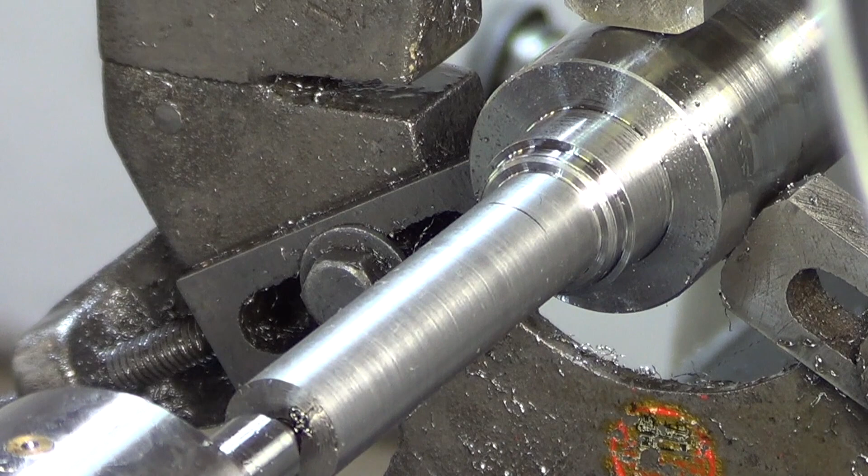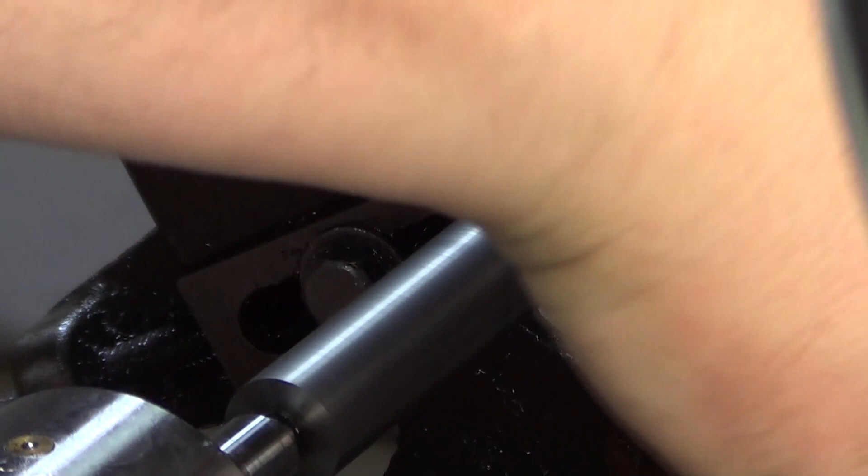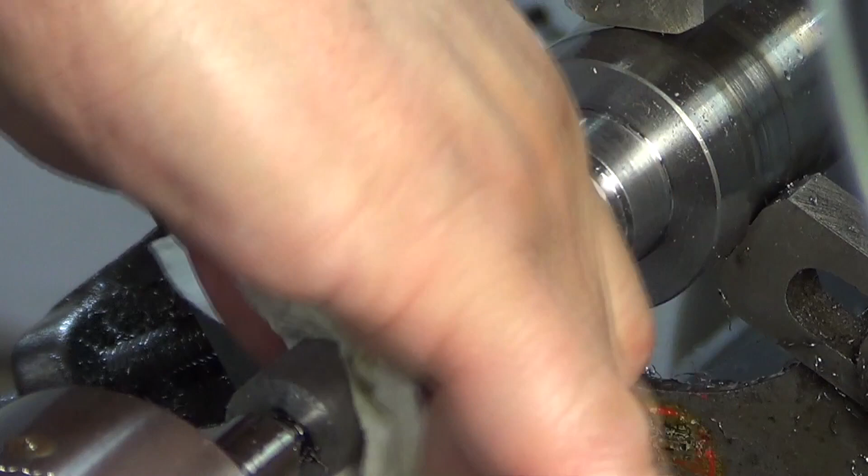Okay, I've got you zoomed right in. And now it's time to do the deed. So let's do it. So this is going to mean a little bit of polishing, cleaning, measuring several times, all right? It's important to do it as often as possible at this point. There's no room for error. So if you're doing this, take your time. There's no rush, guys. Okay, a little speck of dust here. Make sure my mic is good. All right.

See, just that. And I've gone down 1/1000th of an inch already. I'm at 71.5. 671.5. So I've got 1.5 thousandths of an inch to go. This is nice and even, 71.55. We're talking like 5/100ths of a thousandth of an inch here. So I'd rather go, you know, half or 5/10ths of 1/1000th at a time and then not miss my target. So right now I've got 1/1000th of an inch to go.

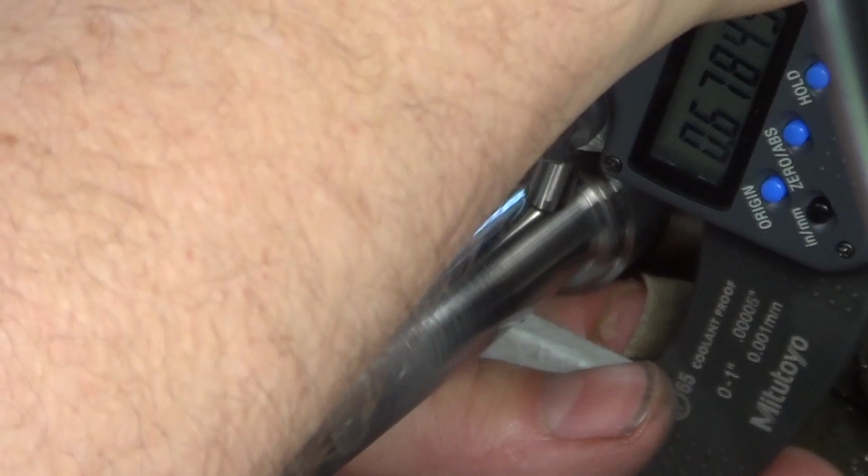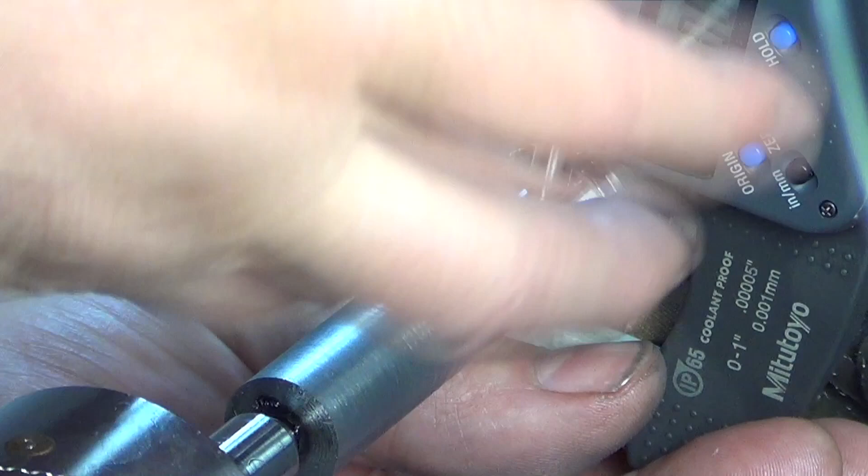And I'm checking my micrometer every single time. There we go. I'm sweating bullets here. This is nerve-wracking for me. Of course, one of the bad things about doing this by hand is that it may not be equal pressure. So probably a good idea if you check the different surfaces, you know, around the circumference. So here I'm right on target at 670. And you know what? I can live with it. 670 and 1/10.

Yeah. Now I said 669.7. That would mean I got 3/10ths to go. You know what? I'm gonna call it even. It's done. So that's how nerve-wracking this can be. But it's done now, right? So I'm very happy with that. So that's done.

Now I need to turn down the part for the pulley up to where the threads are going to start, because clearly I need that diameter to be turned down so that I can thread these really funky threads. So that's what I'm going to get prepared for. The important stuff just never seems to end in a project like this. So now we've got to turn down the pulley journal, and that's got to go down to 580 thousandths. So that's 91 thousandths from the current diameter. I'm going to take 30 thousandths at a time. Let's do it.

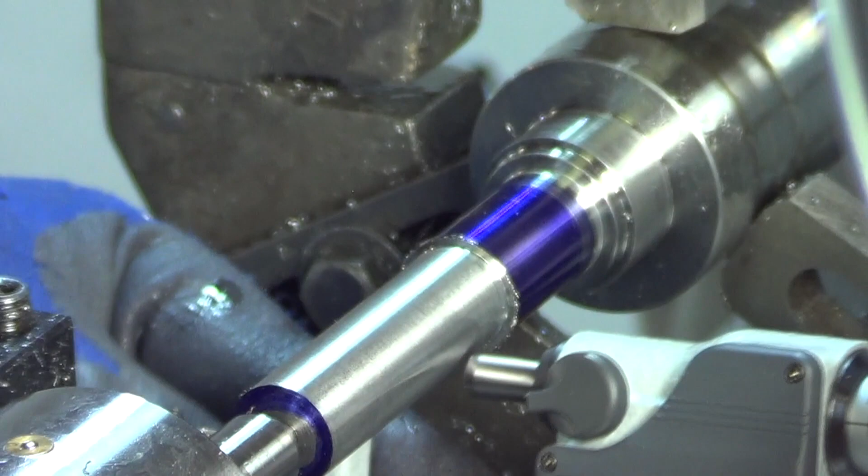I know the pulley sits around here. So I thought I had 20 to go. That's exactly what I've got. I'm at, sorry about my arm, I'm at 600 thousandths. So I'll dial in another 20 and that'll be perfect. So here we go, dial that. Leave myself 1 thousandth to play. Here it comes. All right, do a quick little cleanup here. It's not warm. No, it is warm. So I'm going to wait a couple minutes and come back to it.

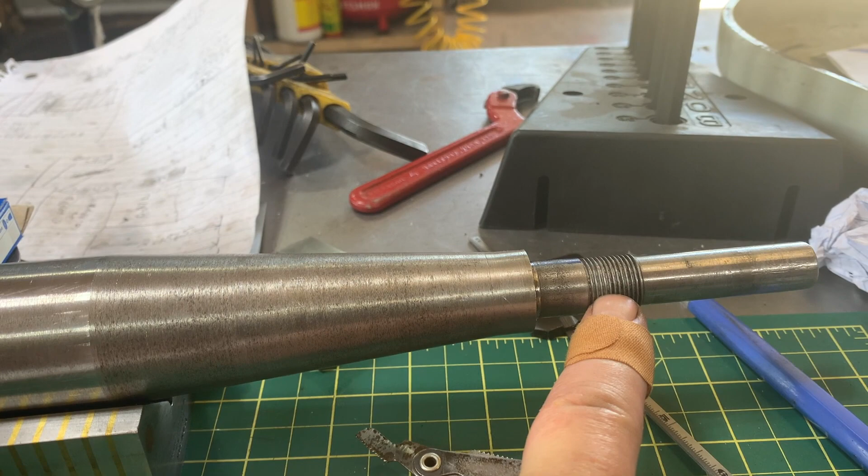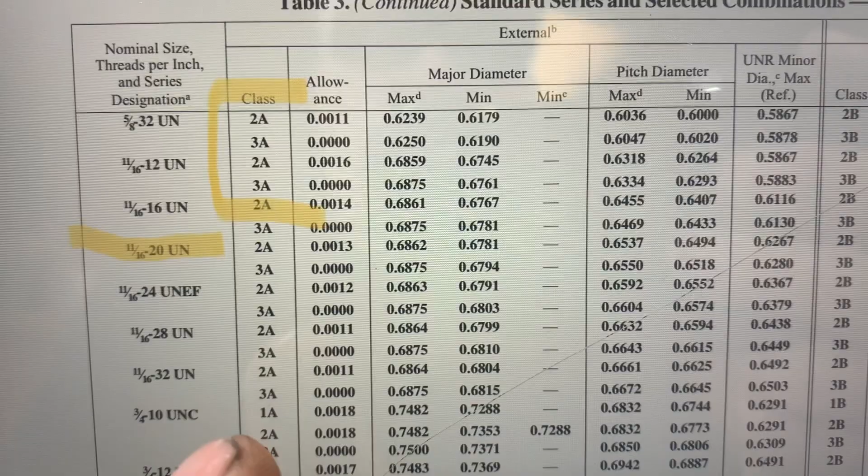Okay, so for the 1,000th time, I've taken measurement of the major outside diameter, which is this here. I've already established that it's 20 threads per inch. And so with this measurement, you go to the Machinery's Handbook, and okay, so that's 6499, right? So you look for a major diameter 6499, and there's no such thing. That would be a 2A at 20 threads per inch, and the closest thing is 11/16, but it's simply not there. And the closest measurement would be 21/32 of an inch. So clearly somebody just dreamed up these threads and went for it.

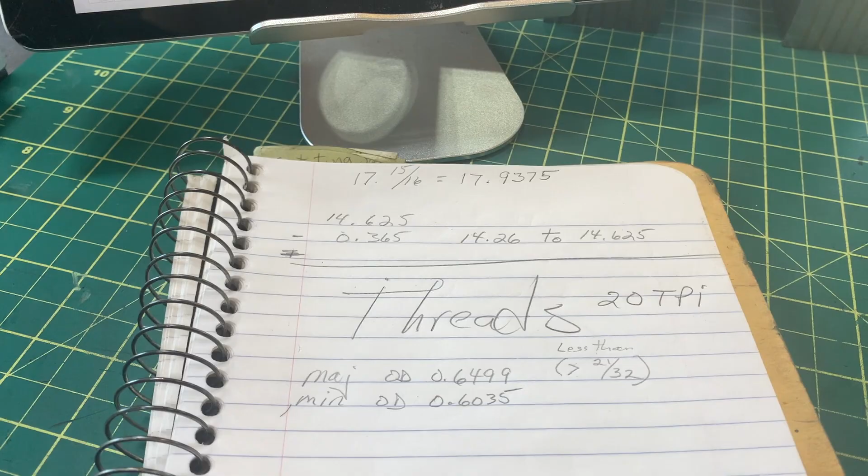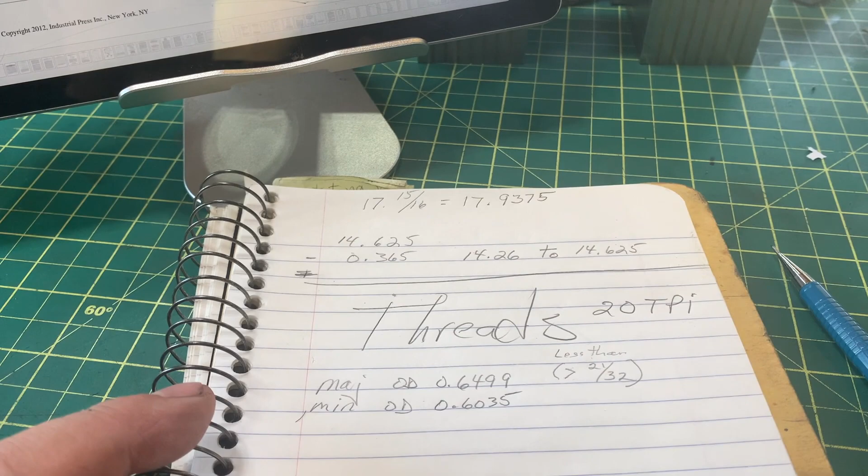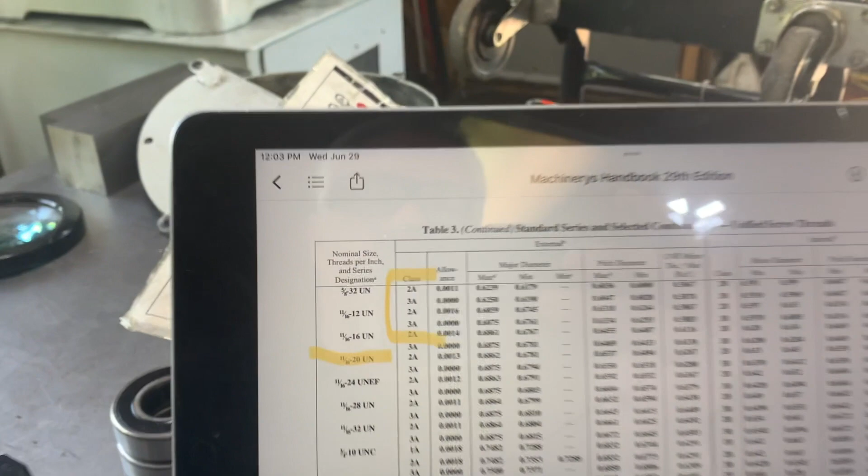And so it's a custom thread. And I'm simply gonna have to go with it, simply because the diameter of the bearing is what it is. So that's what I need to set up for. That's what I'm working against. No standards at all. If you're gonna do chamfers, might as well do chamfers. So I'm going to put one at the end of the shaft. And then of course I gotta clean this up anyway, so I'll do that at the same time.

Well, as nervous as I was about all the other features, this threading thing is by far scaring the crap out of me, because I don't do it very often. So, this was my initial pass. I went through the whole setup.

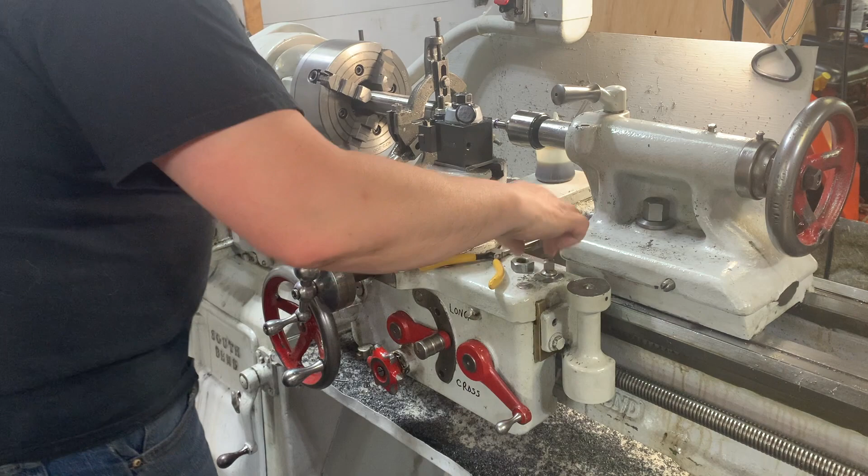So, I'm gonna do that. I've got the original nut on hand to try it as I go. And here we are. Let's do this. My friends, it's time to let her rip. Let's grab some oil and let's do this. Little rag. That nut, put that right here. Won't need this. All right, time to stop getting nervous and do what we need to do. Start with a 5/1000 cut. And let's do this. It's gonna be slow, I'm running on back gears.

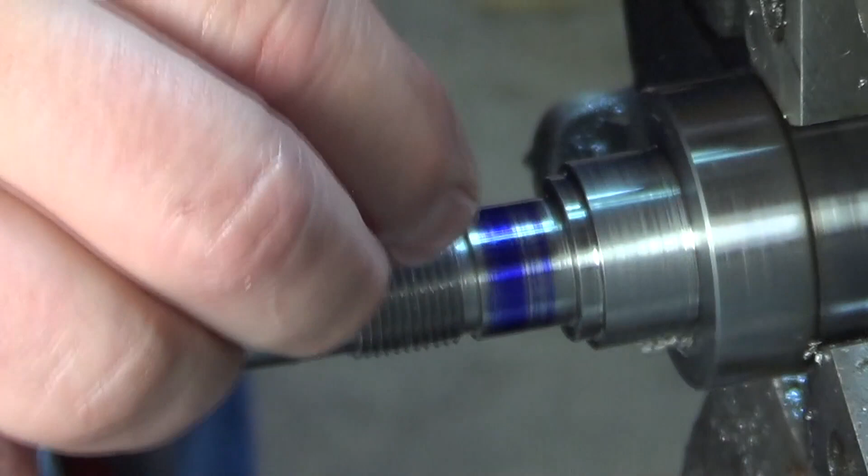This is truly nerve-wracking for me, guys. Like I said, it's not something I do very often, and this is pretty critical, so there is the reason I'm nervous. Up a touch. Let's try again. That's all you can do. Oh my goodness, come on. I think I'm there. I just gotta clean this up a touch.

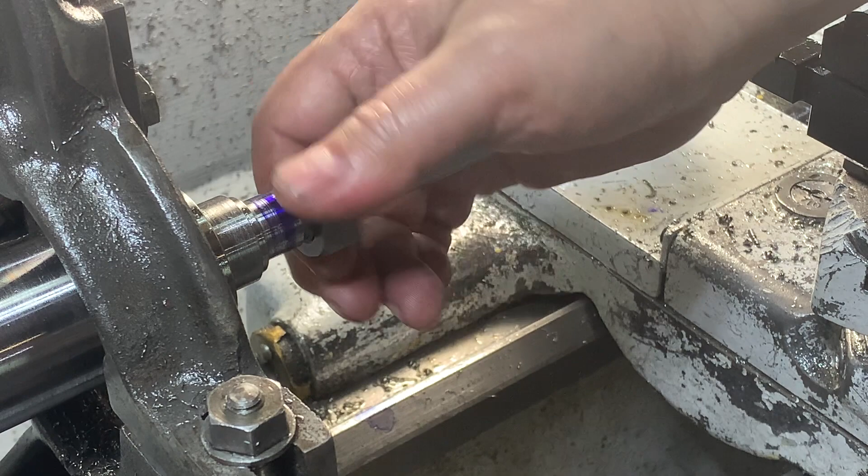Alright, so I'm gonna disengage the back gear, etc. Clean that up, bring you back. Alright, so I've got the threads done, and this was the most nerve-wracking for me. But in any case, I keep repeating that, don't I? But what I wanted was a real nice loose fit at the front, but snug at the back so that this nut wouldn't come loose like it used to.

So to go past this here where I'm going to get preload on the bearing, I'm gonna have to use a wrench, and that's gonna be awesome. So with that said, all that's left to do now is to make a keyway on the mill. So I'm gonna take all this off and do that.

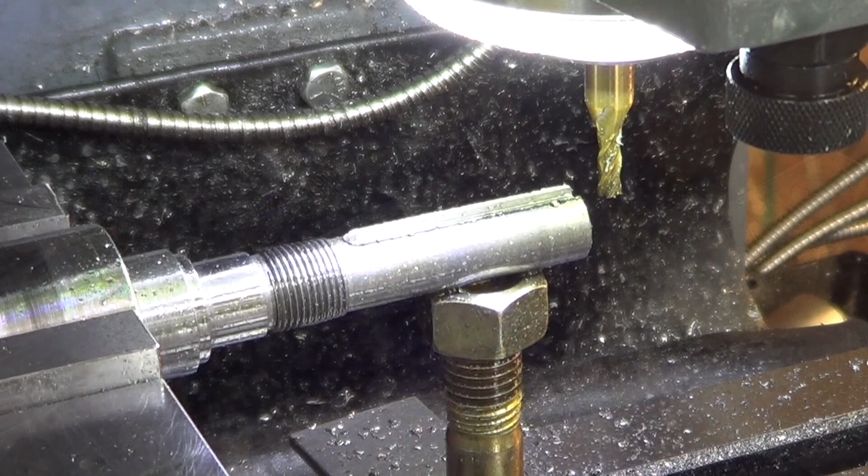Yeah, I'm making the keyway. I forgot to bring you in. Oh, sorry folks. All right, let's continue. I got a few thousandths to go yet. Let's see here. Did this one right up to 95. Okay. All right, here we go. All right, folks, this shall be the last pass. And that's it, my friends. We have a keyway. So, gotta clean that up and then go back to the bench, check out everything.

Ladies and gentlemen, I present to you the most challenging project I've ever undertaken. Making a spindle for a surface grinder. I'm telling you, that was nerve-wracking, but a whole lot of fun too. Okay, so here are the differences. This is mine, that's the previous one, which I believe might have been homemade as well. So here are some of the features. Spindle nose, same thing, except this one is precise and brand new. Fits my spacer perfectly.

This is the bearing journal with pre-calculated bearing preload built in, a proper shoulder for the bearing inner race to sit against, and then to be pushed by this to obtain some preload. At the other end, this is the insert shoulder that goes into the other end. This is a preload shoulder for the bearing inner race, the bearing journal, and if you're interested in understanding precision, going to the Machinery's Handbook, you'll find that for shaft precision, I've selected the M5 category, which is pretty well as good as I could do here anyway.

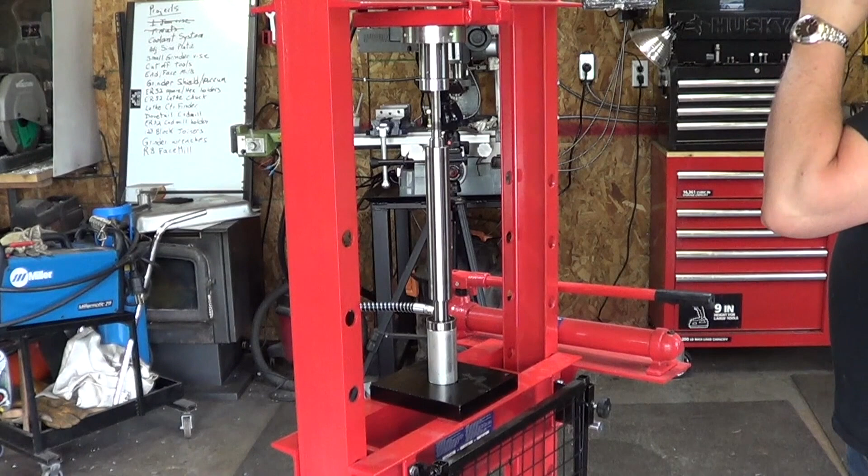Well, I guess it's time to try that new press on those bearings. So this again, brand new bearings. I didn't take a chance. The other ones are going to get used for something else. So here we go. Going very nicely. Definitely press fit. Now this is a 7/10 of 1/1000 oversized shaft, so gives me what SKF calls a high precision setup for radial preload. So I'm pushing this right against the shoulder, and here I am. Okay, great. Release pressure. And now it'll be time to do bearing number 2.

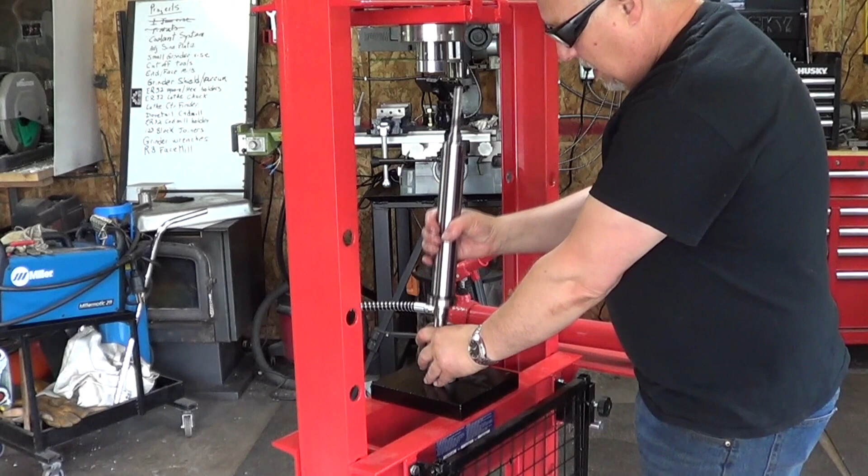So here we have it. Just so you know, I actually used a square and squared up the whole assembly. And I'll be doing the same thing here again. Just to be sure. Alright, see you on the other side.

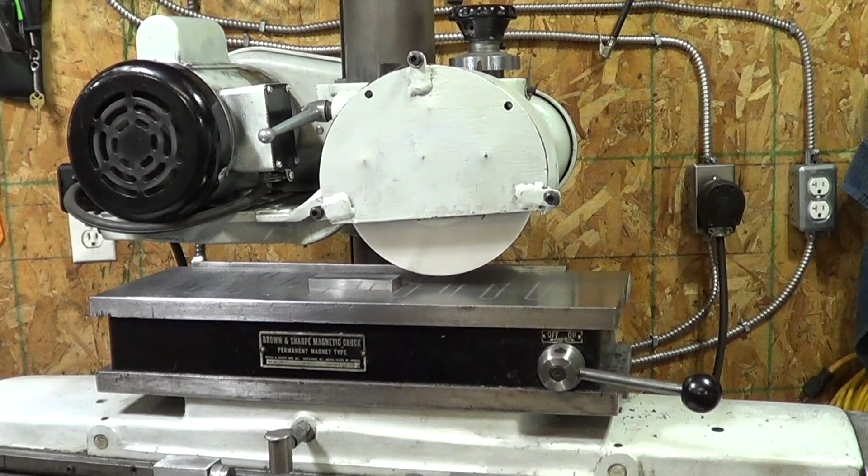Well, already I can tell that the grinder is running much more smoothly. I can hardly feel anything other than the same vibration that the motor's giving out. So that's good. So let's give it a few shots here, see what happens. Nice steady stream. That's a nice change. Alright, let's stop it here.

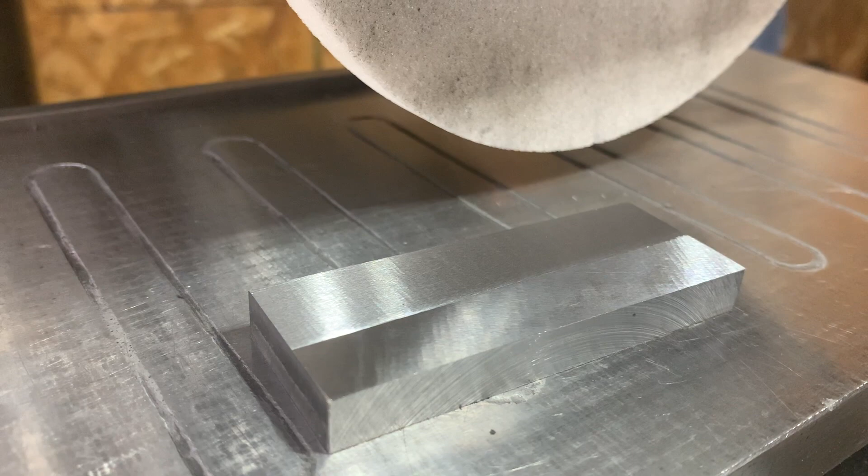Actually, what you see here on this side is what I just ground. Pretty nice finish. Is it perfect, professional? Probably not. But you know what? For a home shop, that's amazing. Now this is the old surface that I was able to make. So big difference for me. So quite pleased with my efforts.

Well, I gotta say this. This was a heck of a project. I got the results I wanted out of it. There's some interesting things that came out of this. One, you can do something this complicated even as a beginner. Just be meticulous, take your time. The other thing is I use a 1944 South Bend 13 lathe. If you have one of those lathes, you can do this sort of thing. Of course, it depends on the shape that it is in, but it just shows you that it can be done.